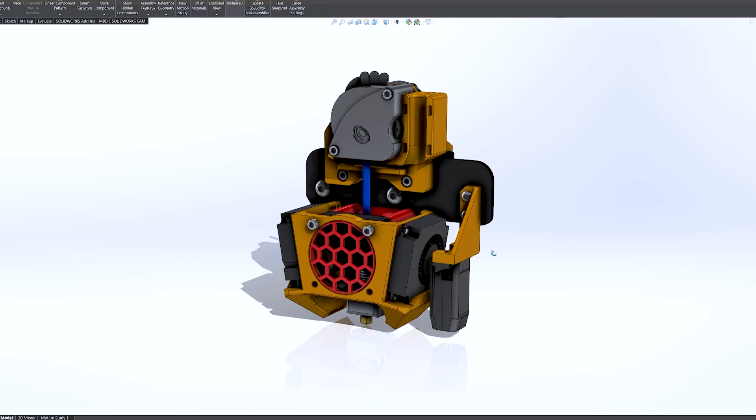And the rest of the video, I'm gonna be walking you guys through how to do this installation. And of course, at the end, we're gonna do some test prints. So let's get started. Let's first take a look at the design and see what we're aiming for. So up at the top, you can see the Bondtech LGX Lite mounted to the Ender 3 Max X carriage bracket. And that bracket is unique to the Ender 3 Max. It's not the same as what you'll find on a regular Ender 3.

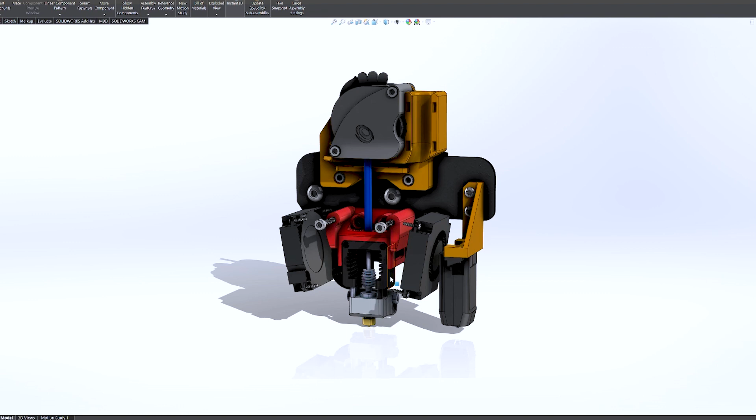On the sides, you'll see that I've reused the dual 4010 part cooling fans, and in behind the fan shroud and axial fan, you'll see the Slice Engineering Mosquito Magnum with its mounting bracket. And if you guys plan on using a CR Touch or BL Touch like I do in this video, I've created a bracket for that so that you will have the correct probe offset and you won't have to change it in the firmware.

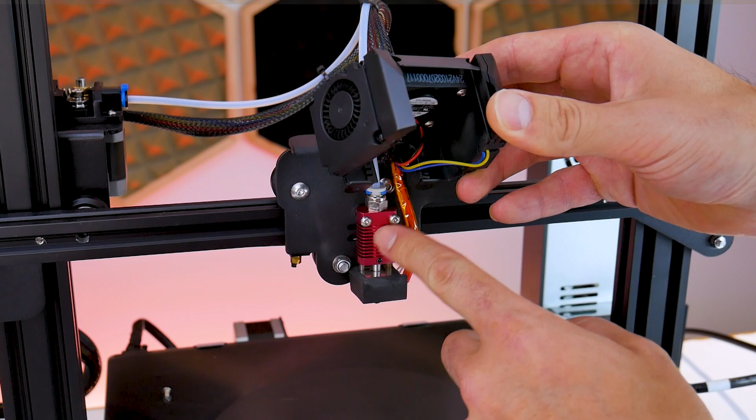Now we can start the disassembly on our machine, and the first thing we need to do is remove the fan shroud. So there are two M3 button head cap screws up at the top of the fan shroud. You're going to remove those and the entire shroud will come off. Beneath that, you'll find two more M3 button head cap screws holding the extruder heatsink to the X carriage bracket, and those you will remove as well. We are going to be reusing all of the fans in this assembly, but we do need to remove them from the original fan shroud.

And to do that, the two part cooling fans on the side are attached with four M2 socket head cap screws. So remove those and the fans will come off. And you'll notice that there are two part cooling nozzles, one for each of the part cooling fans. Those we will not be reusing, so you can just discard those. During this disassembly process, just be careful with the wires on these fans. The wires themselves are quite small and their connections are sometimes a little bit delicate. You do not want to damage them.

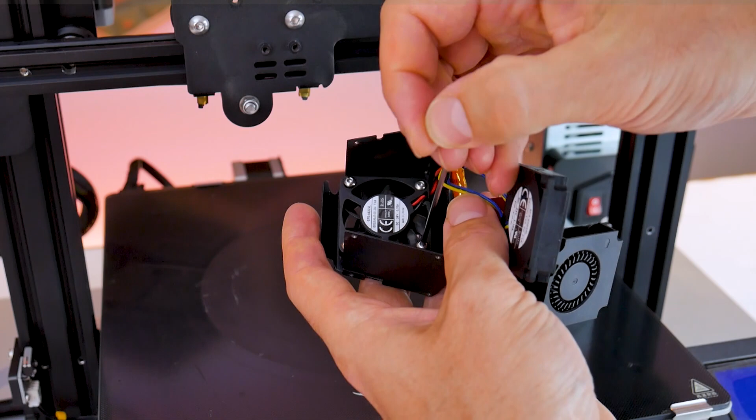You're going to repeat this process for the other part cooling fan, and then in behind the heatsink for the extruder, you'll find the extruder fan, which is just an axial fan held in there with four more button head cap screws. Go ahead and remove those, and then everything should be free from the fan shroud, and you can just get rid of that fan shroud because we won't be needing it anymore.

Now you can use your side cutters to cut away any zip ties holding the wiring harness and the Bowden tube together. Then you can remove the Bowden tube from the extruder assembly on the X gantry, and then you're ready to remove the heater cartridge and the thermistor from the hot end. To do that, you're going to need a hex key and loosen off the grub screw on the bottom of the heater block.

And then you're going to need a Phillips head screwdriver and remove the retaining screw that retains the thermistor in the heater block, and both of those things should pull right out.

Then take your old hot end and throw it in a box, telling yourself that you might need it one day, let it sit there for 5 years, and then after 5 years throw it in the garbage, and then find out the very next day that you do in fact need it.

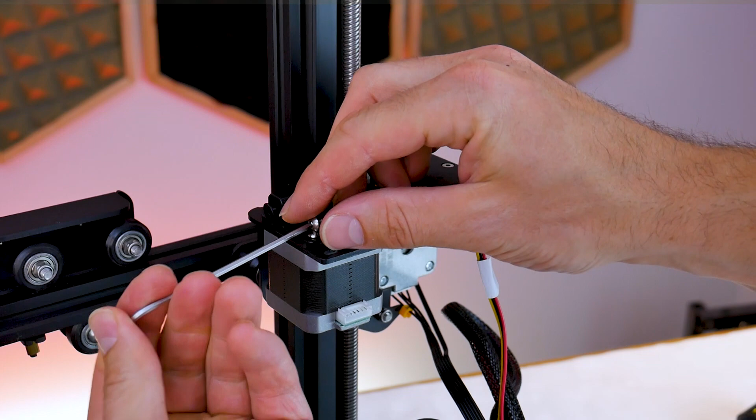Now we can start to strip down some of the parts off of the original Bowden tube extruder setup, and you can start by disconnecting the stepper motor on the extruder, and then you can start loosening off the tensioning screw from the tensioning arm. At the back of the tensioning arm, there should be an M3 socket head cap screw that is the pivot point for this arm. Completely remove this screw, and then the tensioning arm should be able to be removed from

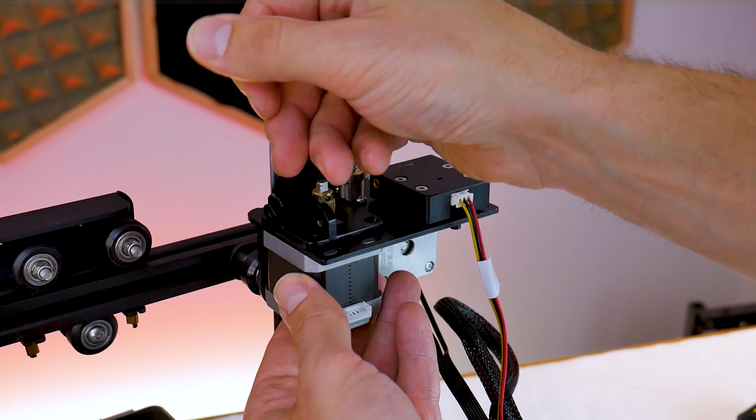this entire extruder assembly. There are three more M3 screws holding the stepper motor to this bracket, and you're going to want to keep your hand underneath the stepper motor while you remove these screws, because there is this mysterious thing called gravity that will cause the stepper motor to fall and smash your glass build plate if you don't catch it once the last screw is removed.

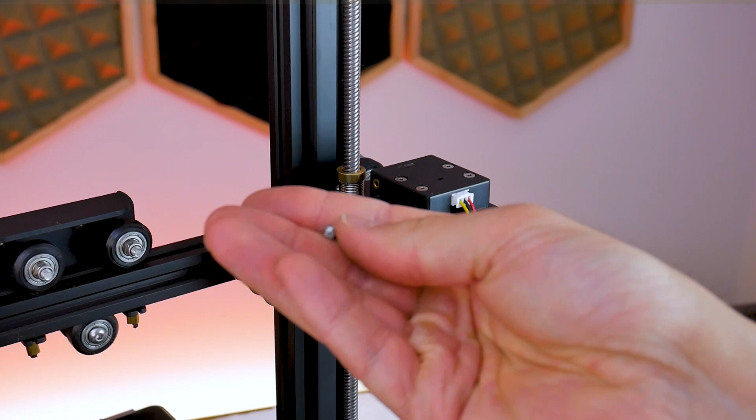Then you can reinstall the original filament guide plate, and those three screws will be reused, but you will need three M3 nylon locking nuts to attach this plate since you're not reusing the motor.

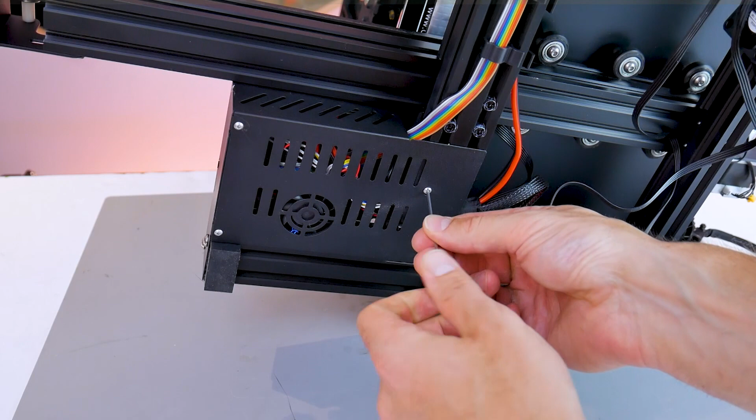Then we're going to need to gain access to the main board in order to unplug the original thermistor and hot end, and to do that, we go to the top of the enclosure of the main board and remove this single M3 screw. There are 3 more button head cap screws on the bottom cover, and to gain access to those, you will have to carefully tip your machine onto its side, remove these 3 screws, and the cover should come off. Do not violently pull the cover off, as the main board cooling fan is still attached to this cover by its wires.

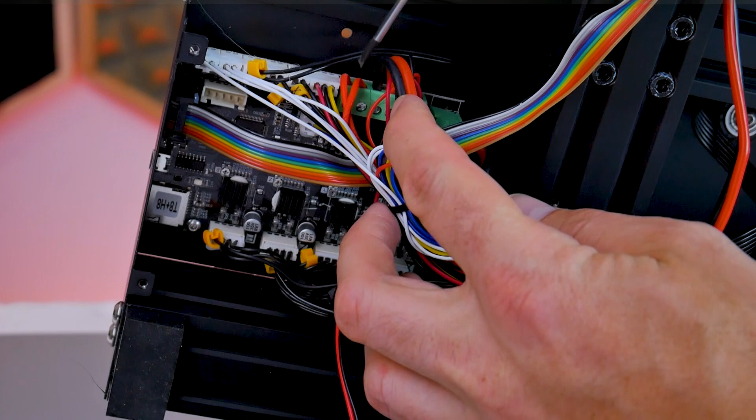Up at the top of the main board, you'll see some screw terminals, and the ones on the left hand side with 2 red wires leading into them are for the heater cartridge. Loosen off these screw terminals and the ends of the wires should easily pop out. And then on the left hand side of the board, you'll find a connector, and there might be some hot glue holding it in place. You're going to have to carefully remove some of that hot glue, and the connector for the thermistor should just pull right out pretty easily.

I'm going to be fishing these wires out of the wiring harness because we are going to be replacing them. And so I'm going to carefully cut away some of the zip ties and then remove some of this wiring harness tape so that I can get those wires to pull out of the wire sheathing. Personally, what I find works best for me is depinning the connector on the thermistor, and then you pretty much just have 2 bare wires, and you can pull the wires right out of the wiring harness out the direction of the hot end.

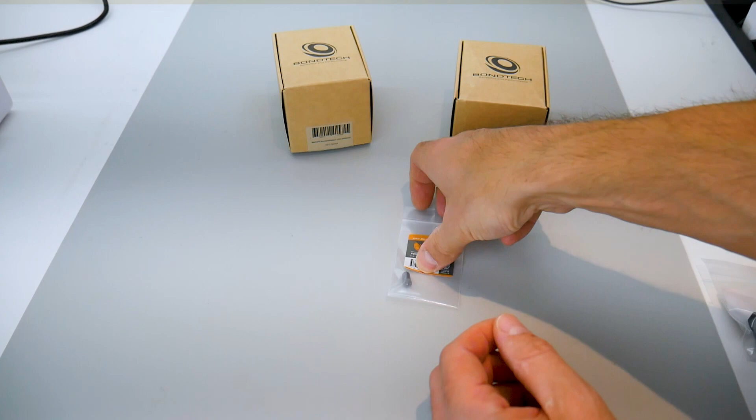They also sent me the silicone boot for the Mosquito Magnum hot end, as well as a 0.6mm vanadium nozzle, and these are my favorite. I've pumped tons of carbon fiber PETG through these on an Ender 7 build, and I've never had one wear out. In the first box from Bondtech, we'll find the LGX Lite extruder, and you'll notice that there is no motor attached to this one. And these extruders take the pancake style motors, and that's what we're going to find in the second box. So this is an LDO motor in the second box compatible with the LGX Lite.

They include the datasheet for the motor, which will come in handy later if we have to swap any of the pins on the connector to get the extruder to turn the right way with the Creality wiring. Now to address the thermistor, what I have here is a cartridge style thermistor. So we have to switch from the Creality bead style to this cartridge style, and that's going to fit inside of the Mosquito Magnum hot end.

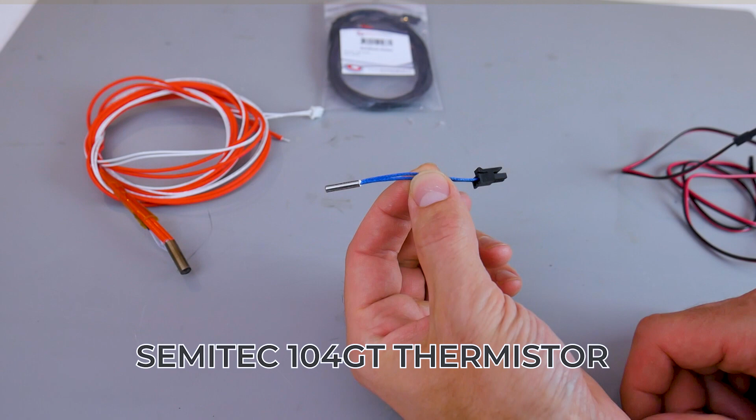And to make our lives as easy as possible so we do not have to do a custom firmware build with a new thermistor table, what I have here is the Semitec 104 GT thermistor. From my research, its temperature table is very close to the standard Creality bead style thermistor, and therefore in the temperature range of PLA, ABS, PETG, and other common materials, we may only be a degree or 2 off in the true temperature, which is pretty easy to live with.

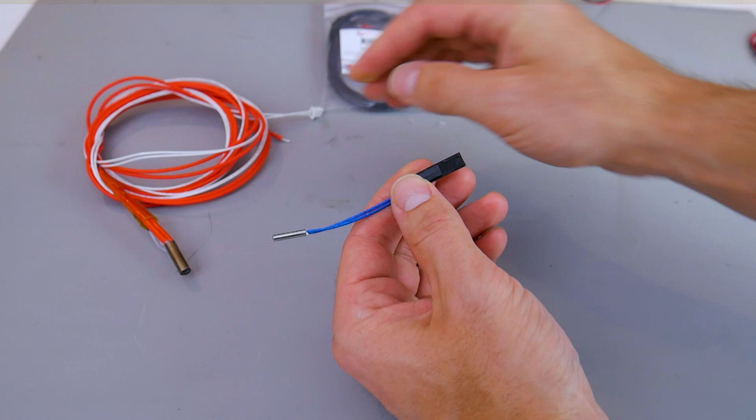The one that I have here has a Molex Microfit 3.0 connector on the end. Unfortunately, the wires on the other end were too short for the Ender 3 Max, and so what I'm going to do here is I'm going to reuse the wiring from the original thermistor. I'm basically just going to cut those wires and crimp on new terminals for the mating connector for the other end of this Molex 3.0 Microfit connector.

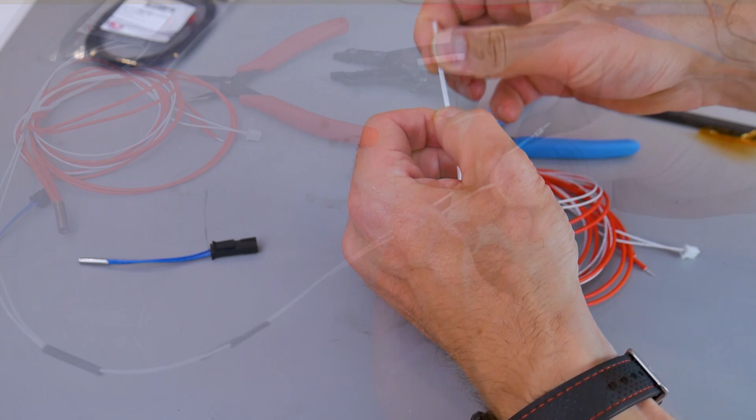I'll put a link in the top right hand corner of the screen to a previous video that I've made about crimping JST style terminals with a pretty generic crimping tool like this one. And the same concept and tool can be applied to these Molex style terminals. So go check out that video if you want to learn how to do that, but the end result is having these 2 terminals on the end of the original thermistor wires that will just clip into place inside of the new Molex connector. Now we can plug it into the thermistor, and the other end still has the JST connector on it, which will mate with the main board.

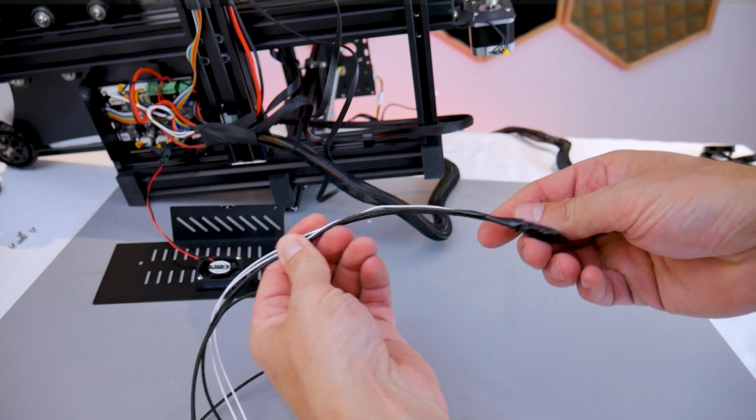Now I'm going to push the thermistor and heater cartridge wires through the wire sheathing, and we're going to go from the hot end side back to the main board. And you'll see that I've wrapped the connector ends in some electrical tape, and that's in hopes of preventing those connectors from getting snagged on that wire sheathing. Once the wires exit out the other end, then you can take the electrical tape off and we can remake our connections onto the main board.

Both of these components are basically just resistive elements and therefore have no polarity. Therefore, it won't matter which way you've repinned your thermistor connector, and the 2 free ferrules that go back into the screw terminals for your heater cartridge. You can put them back in any order. If you have a hot glue gun, you can also apply some hot glue to the thermistor connector to ensure that it never pulls back out.

While we're dealing with the wiring, this is also a good time to install the CR Touch or BL Touch wiring harness. In this build, I'm going with Creality's CR Touch, and so I'm going to take the CR Touch wiring harness, and I'm going to take the smaller connector, which is the connector that plugs into the CR Touch module, and I'm going to have to fish that through the wire sheathing for the printhead.

The larger connector will plug directly into the main board, and you can see the receptacle right underneath of the thermistor connector that we just dealt with, and these connectors are keyed, so don't worry, you can't plug it in backwards. Then you can tidy up your wiring down here a little bit, but do not put the cover back on just yet because we're not done with the main board. We'll come back to this later.

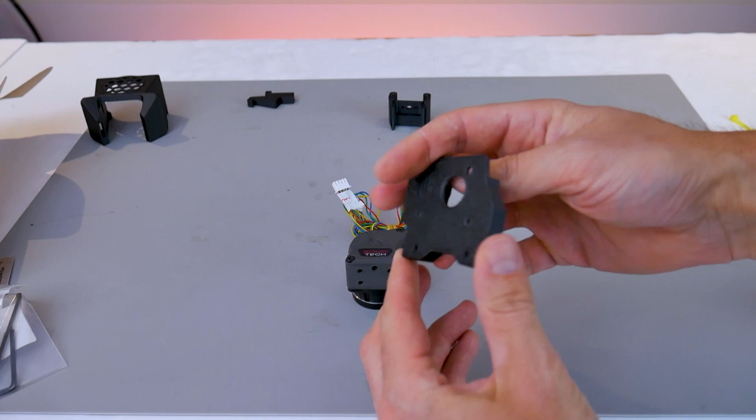Now we can start some of the assembly work on the hot end and extruder, and in this video we're also going to be installing a CR Touch module from Creality. The CR Touch and the BL Touch are interchangeable, so it doesn't really matter which one you decide to go with. And to begin our assembly, we're going to take our Bondtech LGX Lite, and I'm showing it here in its assembled form. You can order it as an assembled kit, or as I showed you guys earlier in the video, it might come in 2 separate boxes if you order the extruder and the stepper motor separate from one another.

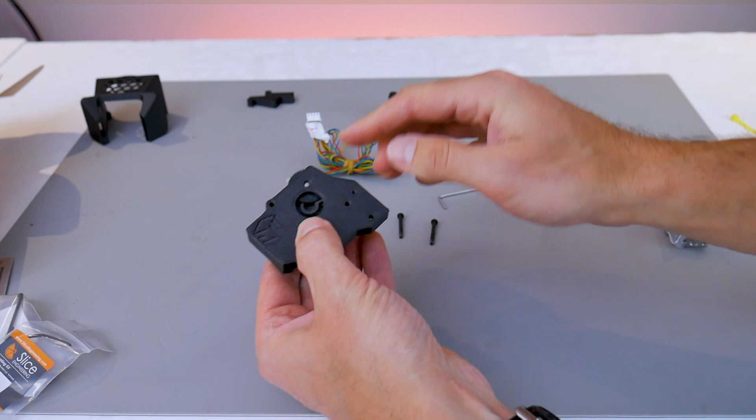The entire LGX Lite assembly is held together with these 2 long M3 socket head cap screws, and after you undo those, the motor can be removed from the back, and there's a small plate that can be removed from the middle of the assembly, and my 3D printed adapter will replace that plate.

Then you can take your motor and put it back on top of the new plate, take your extruder, put it on the front of the plate, and reinstall the 2 long M3 socket head cap screws. And when you're done, it should look something like this.

Now we can also start assembling the hot end and the hot end mount. So we're going to grab our Mosquito Magnum hot end and the hardware kit. In that hardware kit, you'll find a bunch of M2.5 screws. You'll also find some small washers for these small screws.

We're going to be putting those washers on top of the M2.5 by 10 millimeter long socket head cap screws, and we're going to be inserting those into the 2 outer holes in the top of my Mosquito Magnum mounting bracket. I like to add a little bit of thread locker onto these screws because over time they can loosen and you don't want your hot end flopping around.

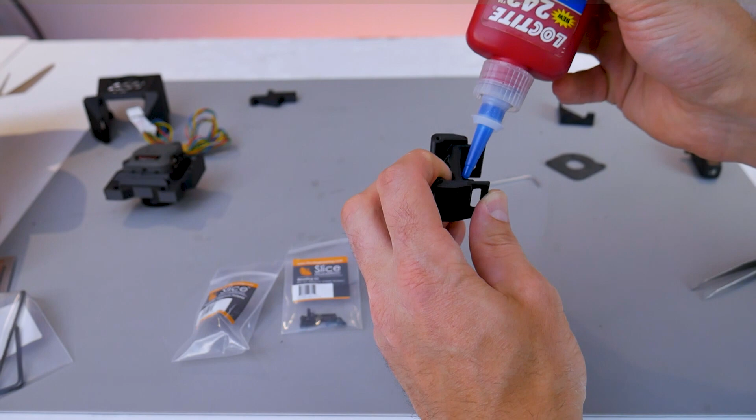The hot end should be a nice snug fit into the bottom of this bracket, and those 2 screws will draw it in and securely fasten it down. Now you don't have to go crazy here with the torque. You got to remember that these are small screws and this is a plastic mount that you're using. And plastic generally exhibits a pretty significant amount of creep over time.

And mechanical creep is basically a time-dependent component of plastic deformation while that plastic is under load. And so one thing you have to watch out for is that over time, the plastic under the heads of the screws will deform and the screws will lose tension. Therefore, initially over-tightening these screws is not going to compensate for this inherent mechanical property of plastic. Rather, what I would recommend is going back and retightening these screws periodically until that plastic fully settles.

Now we can prepare the CR Touch and its mounting bracket. The CR Touch comes with a few different types of hardware. We're going to be using these M3 by 6 button head cap screws. And on the 3D printed mount, you'll see a little cutout for the connector, and you should line up the CR Touch such that the connector is still accessible through that cutout in the mount. The M3 button head cap screws will get inserted through the bottom of the CR Touch, and they'll thread into the 3D printed bracket. And when you're done, it should look something like this.

Now we're going to be installing the hot end subassembly that we just put together onto the X carriage bracket. And to do that, we're going to need 2 M3 by 10 socket head cap screws. Now in this video clip here, these screws that I'm showing are clearly longer than 10 millimeters, but I've since revised this part, so these screws that you would be using will be 10 millimeters long. And this hot end bracket will sit on top of the 2 standoffs on the X carriage bracket, and those 2 M3 screws will screw directly into those 2 standoffs.

Next, we're going to install the piece of PTFE tubing that's going to go between the hot end and the extruder. I would highly recommend going with Capricorn tubing if you have access to it, and this piece is 47 millimeters long.

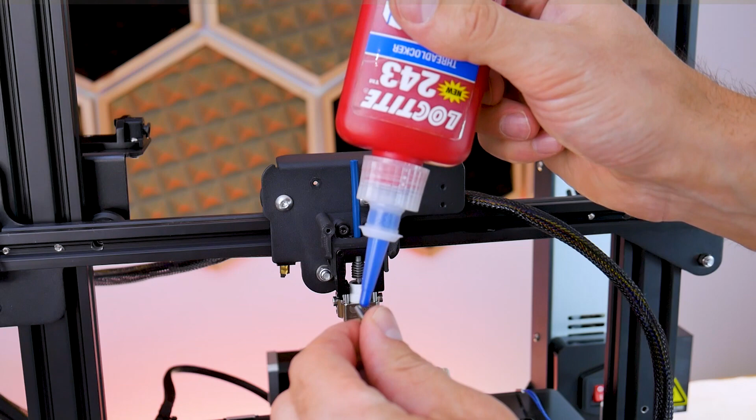Then we're going to grab 2 more M3x10 socket head cap screws and apply a little bit of Loctite. And these 2 here are going to fasten the extruder bracket to the X carriage bracket. The 2 M3 screws sit inside of the counterbored holes in the extruder bracket. And when you are installing this onto your X carriage bracket, you're first going to start by inserting the PTFE tube into the bottom of the Bondtech LGX Lite, and then those M3 screws should line up with the 2 holes on the X carriage bracket, and you can tighten those screws down.

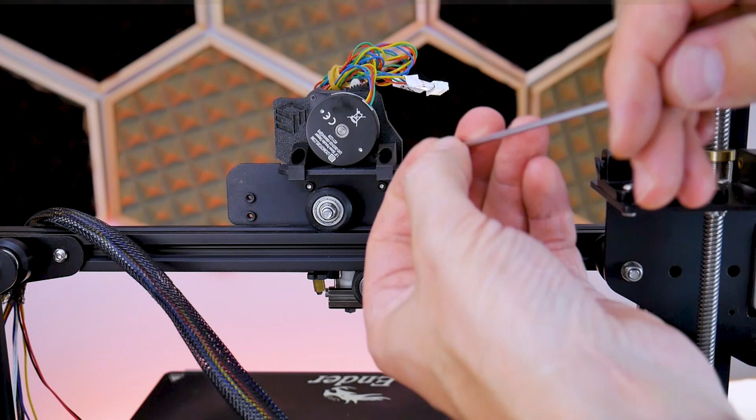Looking at the back of the X carriage bracket, we're now going to install 2 3D printed reinforcement brackets. These 2 reinforcement pieces will hook over top of the back of the X carriage bracket, and then we're going to take 2 more M3x10 socket head cap screws, and those will get inserted into the counterbored holes inside of these 3D printed parts, and those screws will thread directly into the extruder mount.

Back at the hot end, we're now going to remove the retaining screw from the right hand side of the heater block, and then insert our heater cartridge and thermistor. I've applied some of Slice Engineering's boron nitride thermal paste, which gives us the best thermal conductivity between these components. Once these parts are inside the heater block, you can replace the retaining screw to prevent them from coming back out.

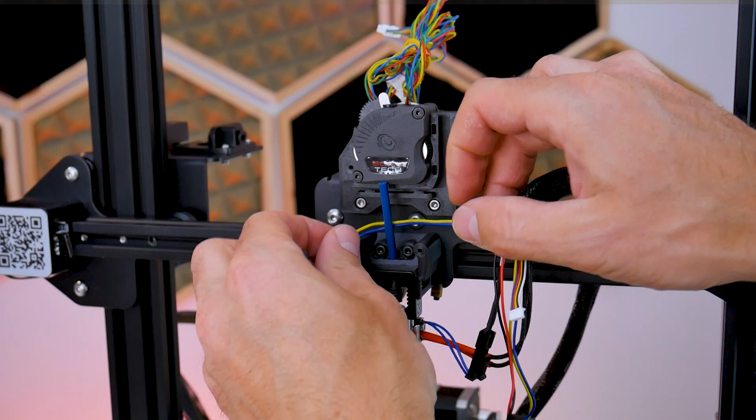Now we can start to position and route some of our wiring around the print head. On the top right hand side of the extruder bracket, you'll find a strain relief. On the left hand side of the print head is where the left hand side part cooling fan will go. You can see I've pulled away the PTFE tube, which is flexible enough to pull out of the extruder, and I've routed the left hand side part cooling fan wiring into a small wiring channel I designed into the extruder bracket. The part cooling fan will sit on the left hand side.

Any excess wiring I push back up into the wire sheathing so I can get the right amount of slack, so when components sit in their final position, the wiring looks neat and tidy. Once I'm happy with the approximate amount of wiring needed, I take zip ties and insert them through the strain relief. Just push them through one side and they'll come out the other side. At this point, don't fully tighten the zip ties, because once the fan shroud goes on, we're likely going to have to push and pull on those wires a bit more.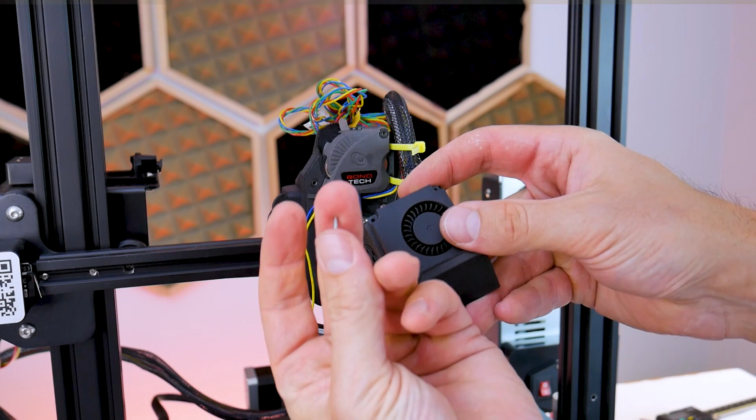The fan shroud is next, and we're going to take the right hand side part cooling fan and remove the wires from the strain relief that's part of the fan body. You can see me pulling the wires out here, because we need to bend them back a little so they fit within the slot of the fan shroud. The radial part cooling fan will sit up against the side of the fan shroud, and there's a small raised lip it will sit inside of that holds it in place while you screw down the fan. Each part cooling fan gets fixed in place with M2x8 thread forming screws, 4 of them per fan.

Then we do more or less the same thing on the left hand side with the left hand part cooling fan, although we will not have to remove the wires from the fan's own strain relief. They'll just bend back nicely, and you'll see I took the wires and slipped them through the cutout in the fan shroud, allowing them to bend as you see and sit on the inside of the part cooling fan shroud. 4 more M2x8 thread forming screws fix the left hand side part cooling fan in place.

Next, we're going to mount the extruder fan inside the fan shroud, making sure it's pointing in the correct direction so the airflow flows towards the extruder heatsink. There will be 2 M3x22mm long socket head cap screws that fix the whole thing into place.

You will have to move some wires around and bundle other wires together. I'd suggest trying not to push and pull too much on the more delicate thermistor wires, and any excess wiring you can push back up into the wiring harness. Once everything is in place, those 2 M3x22mm socket head cap screws thread into the standoffs of the hot end mount.

Then we continue to clean up the wiring, making sure the braided wire loom sits inside the strain relief. You want to take those zip ties and start to snug them down a little bit to clamp down on the wire loom and not on the bare wires themselves.

Then we can mount the CR Touch assembly, and I'm going to take the connector and plug it directly into the probe. From the CR Touch kit, there are two M3x8 button head cap screws that will fix this assembly to the X carriage bracket. The Creality X carriage bracket already comes with two holes on the right hand side where these screws will thread into.

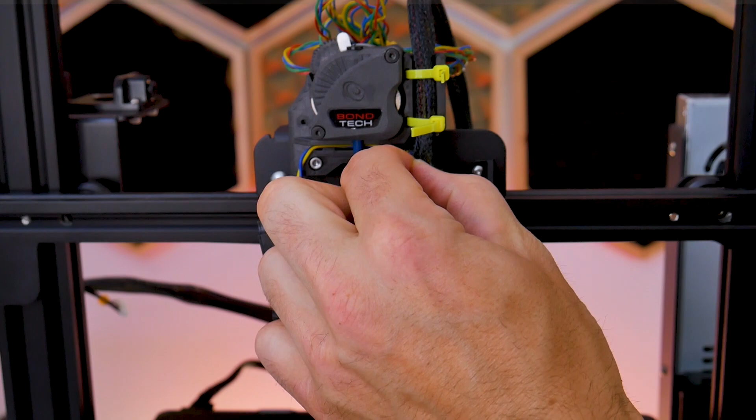With all of the print head components in place, we now know that we have enough wire to reach all of these components. So what I like to do here is just pull down that braided wire loom a bit more and place one more zip tie below the strain relief on the extruder bracket. This is really going to ensure that the connectors of the wires are never pulled on and nothing ever comes loose. When you're done, everything should look like this.

Now we need to address the extruder motor wiring. The LGX Lite comes with this 4-pin connector, and the original Creality harness has a 4-pin connector, and unfortunately both of them are female connectors. So what we need to do here is either splice them together directly, or in my case I decided to go with a wiring harness adapter, and I put two male JST connectors on both sides.

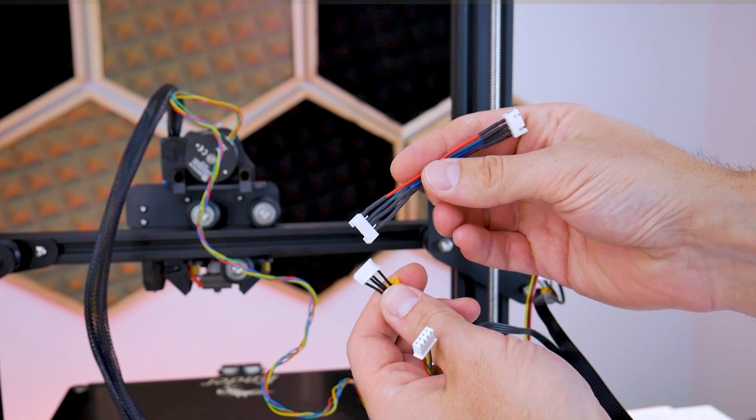Male JST connectors in the wire-to-wire variety are pretty hard to come by, so what I did here was take some board-to-wire connectors and solder my own wires onto the end of them. I really want to reiterate that you do not have to do this. You can simply splice the two harnesses together, and the reason I didn't run the LGX Lite wiring harness all the way down to the main board is that it doesn't quite reach on the Ender 3 Max. If I were you, I would just cut the two female connectors off and splice those wiring harnesses directly together. If you ever needed to replace the motor, you could just cut and resplice because there's plenty of length on the LGX Lite wiring harness.

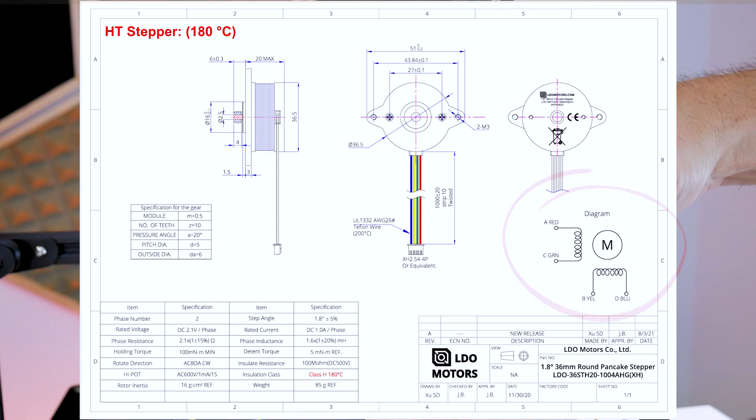Without yet having swapped any of the pins, right now pin 1 of the LGX connector is the red wire, connected to pin 1 of the Creality harness, identified with that little tag with the E on it. According to the LDO motor datasheet, red and green are part of the same coil, and yellow and blue are part of the same coil. If you line those up with the Creality harness, you'll find it goes from coil A, then B, then A negative to B negative. So we have to swap two of the pins on the LDO connector to make sure the coils match the wiring of the Creality harness.

If you've never done it, there are lots of videos on YouTube showing how to repin these JST connectors. You can see here that my wire order is now red, yellow, green, blue, and the red is connected to pin 1 on the Ender 3 Max harness. Again, pin 1 on the Creality harness is identified with that little yellow tag. I hope that wasn't too confusing, but now our extruder motor will turn in the correct direction.

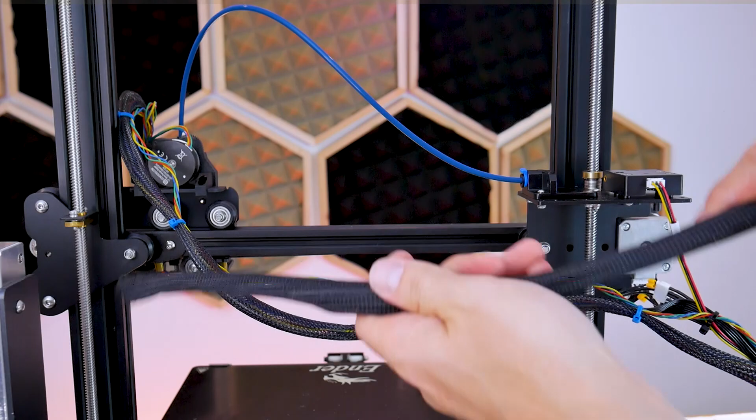Now we can tidy up some of the small remaining loose ends, including the PTFE tube from the X gantry all the way to the LGX Lite, and I'm going with the Capricorn tube here. Then we can tidy up the wiring, attaching the wiring of the LGX Lite to the main wiring harness, and I'm going to use some split loom to further support the wiring harness from the printhead all the way to the X gantry.

The braided split loom is really great stuff because you don't have to fish wires through it. You can just wrap it around existing wiring harnesses. You can see that I've cut the original zip ties on the strain relief on the printhead, and I've replaced them and brought that split loom down into the strain relief to provide even more support to the wiring harness.

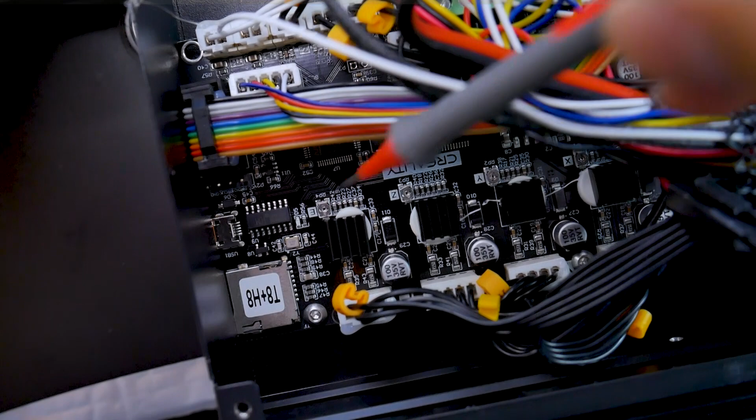If you recall from earlier in the video, we did not put the cover back on the main board because we now need to access this trim pot for the extruder stepper motor driver. You can see that I have my probe from my multimeter, and we're going to be probing the center of this trim pot. But first I'm going to turn it slightly counterclockwise to bring the reference voltage down.

And what we're shooting for here is about 0.9 volts. If you've never done this before, I'm using the black ground probe, touching any ground point on the board. In this case, I'm using the negative screw terminal from the input power coming into the board from the power supply. Do not turn the trim pot screw too much.

Small adjustments will result in pretty big changes in the reference voltage. And by adjusting that reference voltage, what you have just done is limited the amount of current being delivered to that smaller pancake motor on the new LGX extruder. Finally, we're ready to tuck our wires back in and reinstall the main board cover.

If you've installed an auto bed leveling probe, we now need to do a firmware update, and the firmware needs to match the version of the main board that we have. In my case, I have the older 4.2.2 main board, and I've found a version of the firmware on Creality3dofficial.com. This is a distributor of Creality products, not the actual official Creality website.

That's because, as you see here, on the official Creality website, you'll only find the auto bed leveling version of the firmware for the newer 4.2.7 version of the main board for the Ender 3 Max. Now, if you're asking why you can't find the auto bed leveling version of the firmware for the 4.2.2 version of the main board for the Ender 3 Max on the actual Creality website, that's when you're just gonna have to stop asking questions, because this is pretty much how Creality operates. If you're not already familiar with their antics, well, here's your first foray into some of the weird things that they do. But as you can see, at least they have the 4.2.7 version of the firmware available, so you can get that from them.

Then you need a clean formatted 8GB micro SD card, and you're gonna take the firmware file that you downloaded, which should be a .bin file, and copy it onto the SD card. Now you can pop the SD card into the printer, and you're going to power it back on.

In a few moments, you should see the Ender screen flash back up, and the firmware should have been updated. You can power cycle the printer again, and up until this point, if you've done everything correctly, you should see a purple looking light on your CR Touch module. Red lights are bad, purple is good. And if you really want to make sure the firmware was updated, you can go down into the About Printer, and you can see the firmware version.

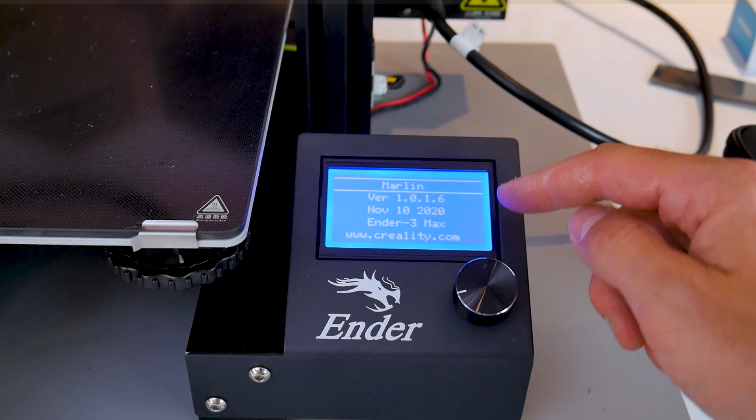Before we can start printing, we need to take care of a few more things, and I've connected the printer to a print host, in this case Repetier host, and you can see that the printer has successfully connected. Then I'm going to go up to the G-code terminal and type in M503, and this is going to bring up all of the printer settings. I'm going to be looking for an M92 line, and you can see here it says E93, and that means I have 93 steps per millimeter right now for the extruder.

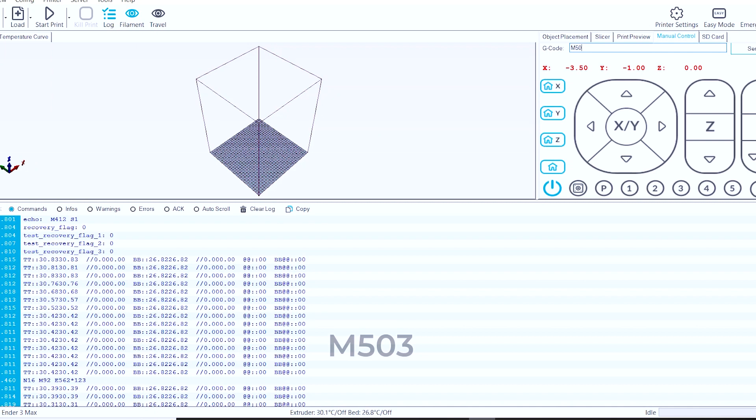We need to change that, so we're going to go M92 E562. To see if the printer successfully changed the E steps to 562, I'm going to type back in M503. I'm going to look for the new M92 line, and yes, it says E562. So we're going to save that by typing in M500. And if you're finding that it's not saving these commands, you might have to check to see if you left the SD card in the machine, because without the SD card, it won't save it.

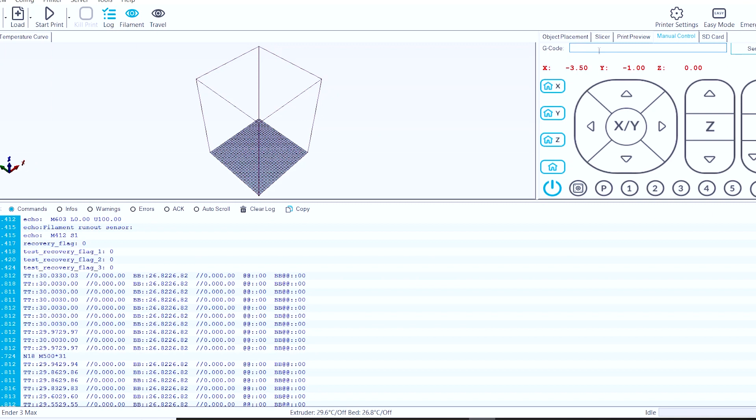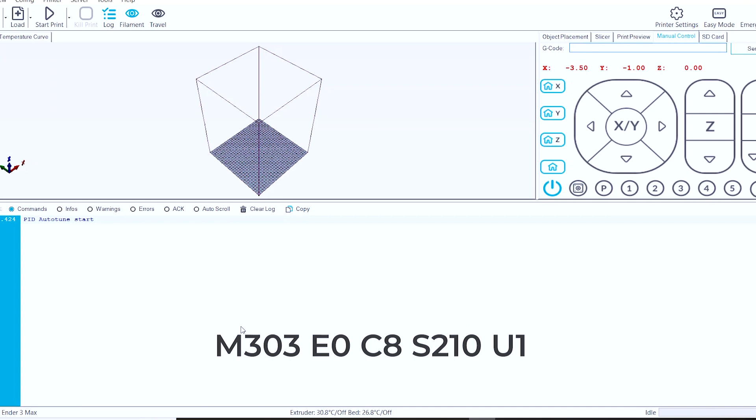After that, we have to run a PID Autotune for the new hot end. So M303 initiates a PID Autotune. C8 just means that we're going to run through 8 cycles of testing. S210 means we're going to center the temperature around 210 degrees Celsius. And U1 indicates to the printer that you're going to write those new values to memory once the testing is complete. If you plan on running higher temperature materials, consider centering your PID Autotune around the print temperature of the material that you wish to run.

The process should take a few minutes, and then you should be able to find a message that says PID Autotune finished, and you'll see the new values. And although we told the printer to use the new values immediately after finishing the PID Autotune, it's still not a bad idea to just make sure those values are saved in memory by typing in M500 one more time.

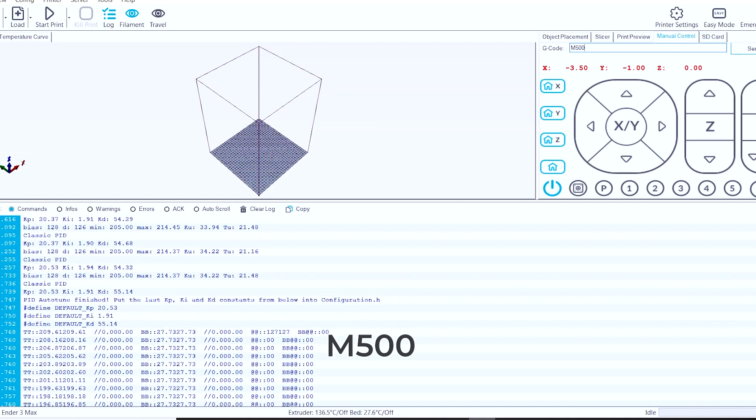And then immediately after that, you can type back in M503 to make sure the printer spits back the new values. So go ahead and look through all of that newly printed information, and on the line that says M301, you should see the new PID values that match the ones that you saw when the Autotune finished.

Now that we have the proper PID settings for the hot end, I'm going to turn the nozzle temperature up to about 230 or 240 degrees and double check the tightness of the nozzle. If you guys are doing this, don't go too crazy. It's just a very small nozzle. It only needs to be lightly torqued.

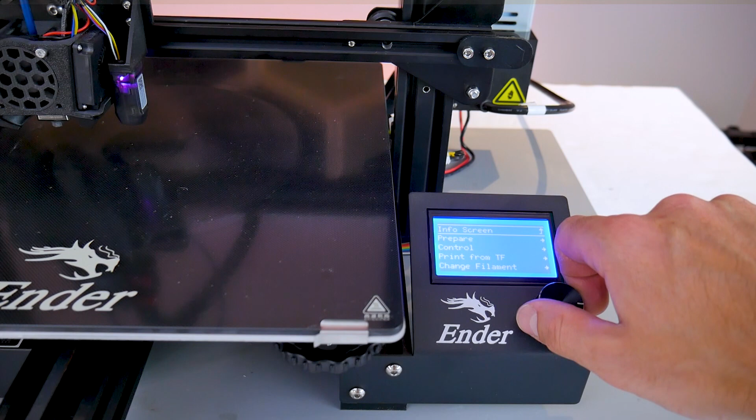After that, I'm simply going to home the printer, because the next thing we're going to do is set the Z offset and level the print bed. But before we do that, I like to let the print bed heat soak. So I'm going to set the print bed temperature to 60 degrees Celsius, which is typically what I run for PLA, and I'm going to let the print bed sit for about 5 minutes at 60 degrees.

In order to get the proper Z offset for the new auto bed leveling probe, I'm going to have to move the Z axis into the Z equals 0 position. You'll also see me temporarily disable the stepper motors here just because it's easier to move the print head around by hand. And I'm going to move that nozzle approximately to the middle of the print bed. And again, with the paper, you can see there's too much room between the nozzle and the print bed when the nozzle should be at Z equals 0.

And now with the new firmware, you can see in the bed leveling area, there is a Z offset section. So when you head into that, you can adjust the Z offset into the more negative space, and that's going to bring the nozzle closer to the print bed. And using a piece of paper, you should feel a light drag between the nozzle and the print bed with the piece of paper in between.

With the new probe offset established, I'm going to auto home the printer again and then tell it to go back to Z equals 0 so I can double check the position of the nozzle with respect to the print bed using the piece of paper method. What you might find is that you'll have to make some further adjustments to the Z probe offset, and this is what I had to do. I had a little too much space, but unfortunately with the Ender 3 Max firmware, you can only make adjustments in increments of 0.1 millimeters, which doesn't give you very fine resolution for the Z probe offset.

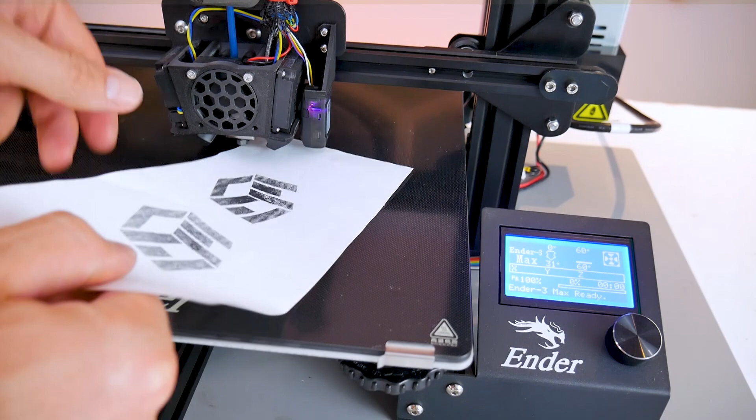However, what I found on other Creality machines, which I think is really odd, is that if you're making live adjustments, so while a print is actually going on, you can change things like the Z offset. And that is essentially the Z probe offset. And while you're doing it live, some Creality firmwares allow you to have a finer resolution while making live adjustments than while making adjustments like this, not during a print.

And so once I'm happy with the offset, at least for now, I'm going to disable the stepper motors again because I'm going to manually move the print head around while I do the bed leveling with the bed leveling knobs. And I see this question come up all the time online. If I have an auto bed leveling sensor, why do I still need to level the bed using the bed leveling knobs? And the answer to that is that you want the printer to have to compensate as little as possible using the auto bed leveling system. Having your printer properly trammed right from the start will always yield better results than having the Z axis constantly move around to compensate for a poorly trammed printer.

And finally, we're now ready to run the auto bed leveling. So in the bed leveling section, you can just hit level bed and the printer will go ahead and initiate the auto bed leveling process, whereby it should measure about 16 points across the print bed and save them into the printer's memory.

Loading filament into your new extruder and hot end is extremely easy, and with the LGX Lite, what I like to do is remove the PTFE tube from the top of the extruder. Make sure that your hot end has been preheated to the proper temperature, and then what I like to do is push the filament in through the filament runout detection sensor through the PTFE tube, and then you can grab it by your hand and force it down through the hot end until you see it come out of the nozzle. Once you see filament coming out of the nozzle, you can push the tensioning lever over into the first position, and that's more than enough tension for PLA.

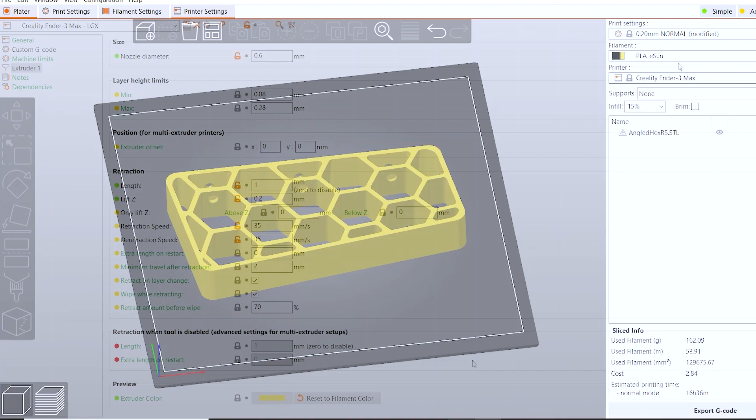And for me on this machine, I'm going to be running a 0.6 millimeter nozzle. So I'm going to change the nozzle diameter up at the top to 0.6 millimeters. And then one thing I forgot to show in this video clip here is that I should also change the layer height limits because I'm using a larger nozzle diameter. So under the layer height limits, there's a maximum layer height setting, and I should change that to about 0.4 millimeters in my case.

Now, if you've been 3D printing for a while, you've likely seen other videos outlining the advantages of running a larger nozzle. And so what I'm going to do here is go through that, but then also show the advantage of having a better hot end with a larger volumetric flow rate capability. So right now I'm setting up my slicer with this part to have pretty much the default settings for the Ender 3 Max. I'm going to be running a 0.2 millimeter layer height and using all of the other default settings for PLA and the printer. And the only thing I've changed in the print settings was just to make sure that I had 3 perimeters and 3 layers on the top and bottom of the part.

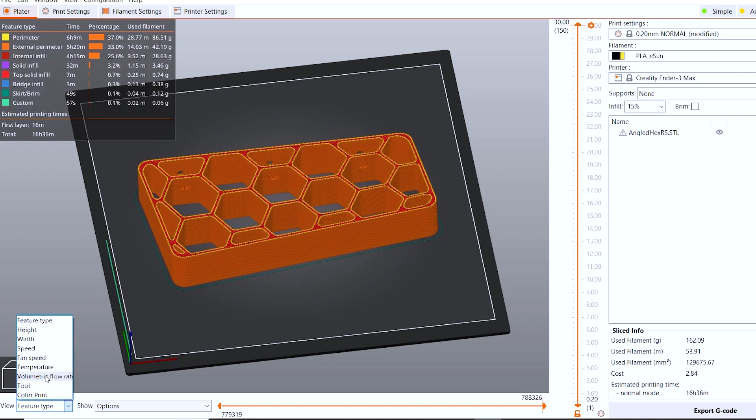The infill setting I'm going to run at 15%, and when I go to slice this file, you'll see here that with the default settings, this very large part comes out to about 16.5 hours. In this case, most of that time is spent on the infill and perimeters and external perimeters, and that's because there's a lot of empty space in this hex pattern part. In terms of the volumetric flow rate, you can see here that I'm not reaching anything over about 5 cubic millimeters per second, and although the stock hot end is capable of doing more than that, I just want to show you with the default settings what kind of print times you would get.

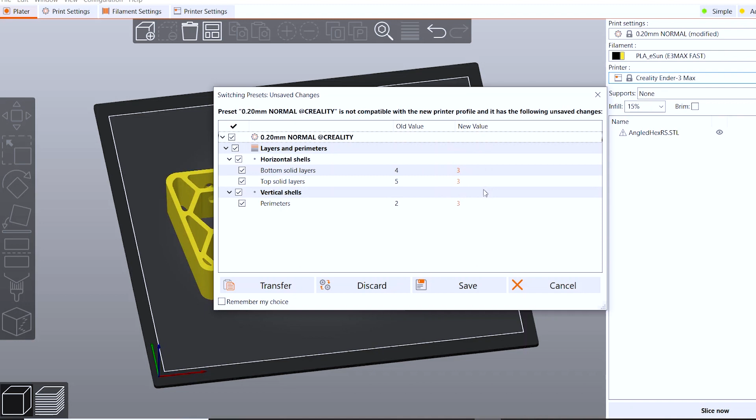Now I'm going to swap some parameters over to settings that better suit the Ender 3 Max with the upgrades that we just performed. And so in the filament settings, I've changed the maximum volumetric flow rate to 20 cubic millimeters per second. And the Mosquito Magnum hot end should be able to do that with ease. When I performed this exact upgrade on my Ender 7 using the LGX Lite extruder combined with the Mosquito Magnum hot end, I ran some benchmark flow tests and I could easily hit 30 cubic millimeters per second.

So this is pretty conservative. Now in the print settings, I'm going to change the layer height to 0.4 millimeters, and in the vertical shells, I can leave it at 2 instead of 3, and that's going to give me the same vertical shell thickness, because when we had a 0.4 millimeter nozzle, if I had 3 walls at 0.4 millimeters, that's a 1.2 millimeter wall thickness, and now I have 0.6 millimeter walls times 2. So I still am achieving a 1.2 millimeter wall thickness.

And in this profile, I actually just slowed down my linear speeds to better match the default Creality profile that I just originally sliced with, just to show you guys that by simply changing the layer heights and not much else, we can reduce the print time from 16.5 hours all the way down to close to 7 hours. So 6 hours and about 45 minutes, and that's incredible.

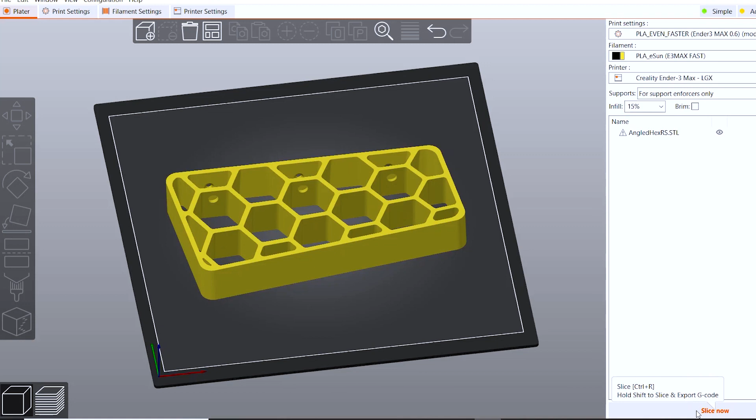And so I switched print profiles yet again, and in this case, the perimeters are going to be set to 75 millimeters per second, the infill speed to 65. Pretty much all of the other parameters are the same. Infill density, I'll make sure is at 15%. And just to show you guys I'm not messing around with anything here, the layers are still 0.4, perimeters 2, and the horizontal shells at 3 at both top and bottom. So we'll slice again, and we'll find out if we've saved any more time.

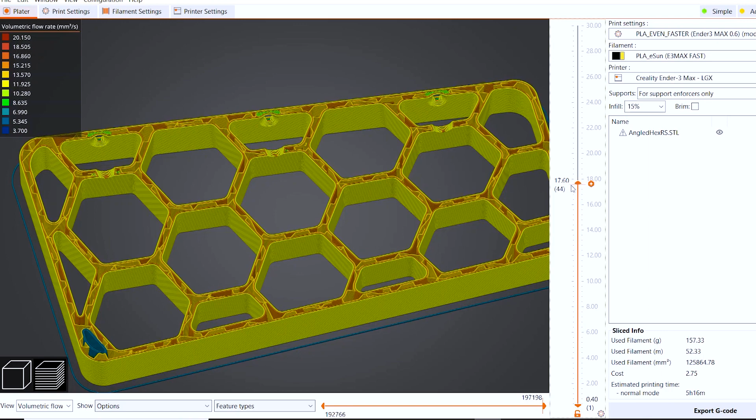And in fact we have, so we've gone down now to about 5 hours and 15 minutes. Knocking another hour and a half off of this print from about 6 hours and 45 minutes is roughly about a 20% savings in time just by changing the linear speeds. And now I'm only up to a volumetric flow rate maximum of about 20 cubic millimeters per second.

And the hot end definitely has more, but to be honest, at this time I have not spent enough time with the Ender 3 Max dialing in all of those little settings to optimize print quality along with speed. So for now, I'm just going to stop there so that we can get started printing, and the print quality should still be very acceptable.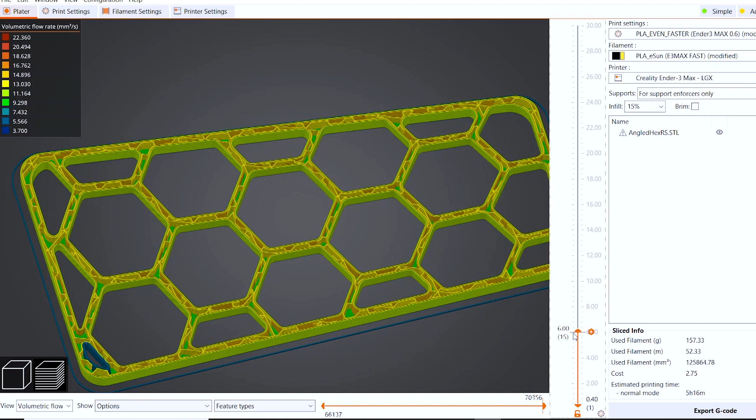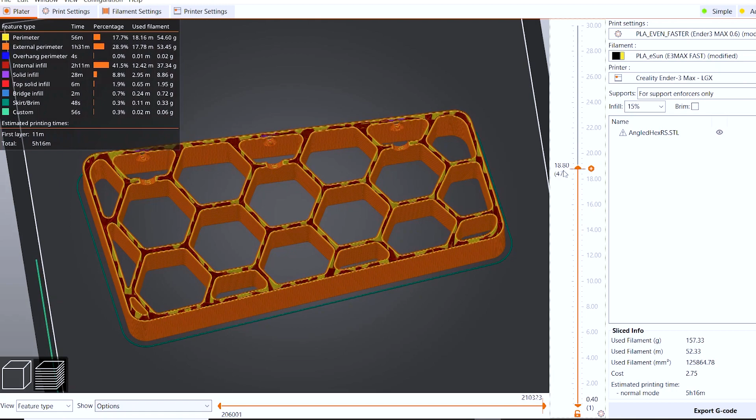And so what I think you should take away from this very simple example is how effective the larger nozzle is, and then how much further you can push that larger nozzle with a much more capable hot end. With the regular Ender 3 Max hot end, you might be capped at, let's say, 10 or 12 cubic millimeters per second flow rate, and that's going to limit how fast you can print and how efficiently you can use the larger build volume of the Ender 3 Max.

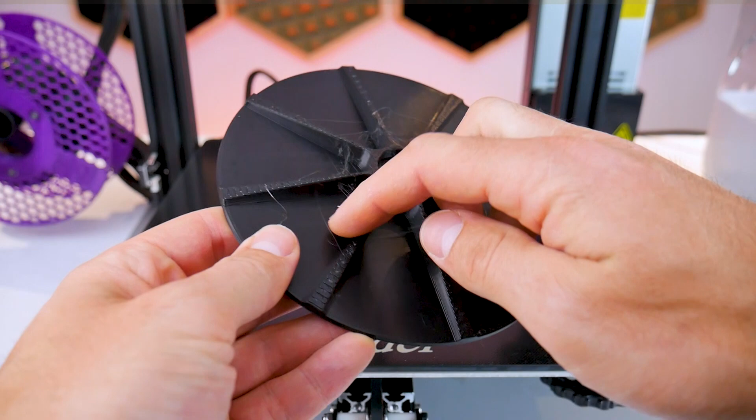Finally, the moment we've all been waiting for, and this is the very first print with the new upgrades. And so I have not sped up or slowed down this video clip, and you can see my first layer speeds are very conservative, and you can also tell this is the first print because that nozzle and heater block are still extremely clean. With the auto bed leveling sensor, I was able to print off a pretty large part, and the first layer went down super clean. The rest of the part was also very clean.

However, I do have some tuning to do to try and get rid of that stringing. Since I'm running a larger nozzle with larger layer heights and faster speeds, I did bump up the print temperature about 10 degrees on this first part, and that's probably why I'm seeing a little bit of stringing. With the higher print temperature, obviously the filament flows a little bit better, but then you also get more stringing. So I'm gonna have to try and tune that out and work on this profile a little bit, but otherwise the part looks pretty good.

Under some lighting, I can also see a little bit of pillowing on the top layers, which may also be a function of the higher print temperatures, and so I can probably rectify that with another top solid layer, or perhaps increasing the cooling a little bit on those top layers.

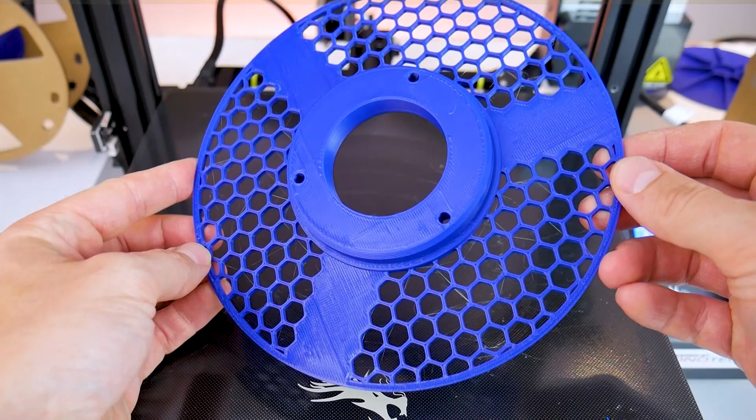Here are a few more parts that I printed in blue PLA, and it's a little easier to see the details of these prints against the black print bed. Everything turned out quite nice with these prints as well. I did drop the print temperature a little bit with these ones, so I did see less stringing.

However, one other thing that I'm starting to notice here on some of these prints is that my top layer has a little bit of over extrusion now. So in Prusa Slicer, I don't believe that you can independently adjust the flow rate of just the top layer. I think you can do that in Cura. So I'm going to have to investigate why I'm seeing over extrusion in just the top layer, but the rest of the prints turned out very nice overall.

And with those larger layer heights, I was saving a ton of time on each of these prints. Also, with the cooler print temperatures, you can see on this exact same part that I had printed previously in black, the blue part does not have that same pillowing on those top layers. So it turned out much better, and I didn't have to make any other adjustments or add any more top layers.

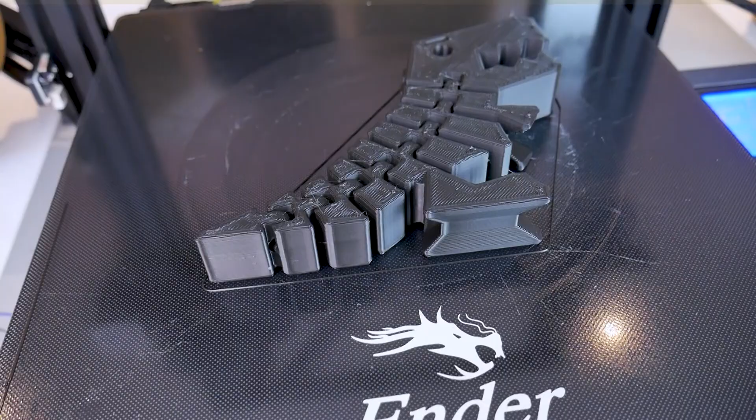Then I started swapping back to the black filament, and I printed one of these Flexi Rex articulated dinosaurs. And you can see the top layer still does have some over extrusion, and you can see where the nozzle has sort of dragged through that a little bit. But the walls came out quite nice and clean, even with the 0.4 millimeter layer resolution height. And those little features on the back of the dinosaur's spine also came out pretty nice.

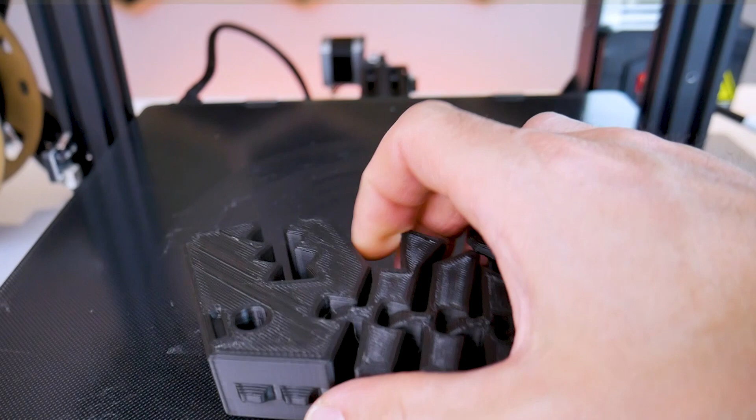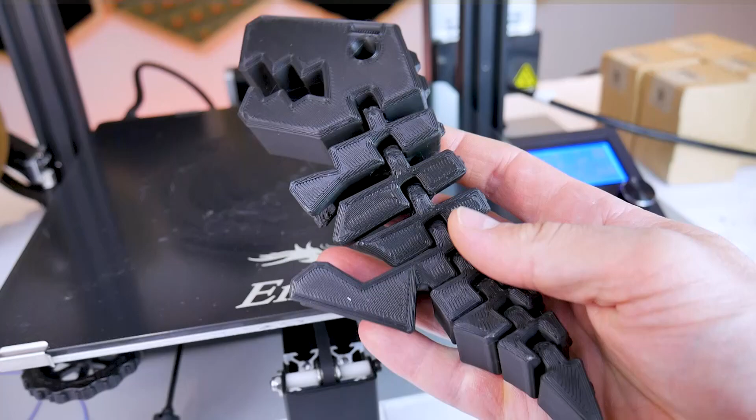So the part cooling fan in that particular case seemed to be working just fine. None of the articulated joints fused together, so again with the 0.6 millimeter nozzle, this was not an issue. The bottom layer was super clean, as you would expect with the auto bed leveling feature. And then you can see on the very steep overhangs on his arms, I probably could use a little more cooling, but these are challenging to print when you're using large layer heights and large line widths.

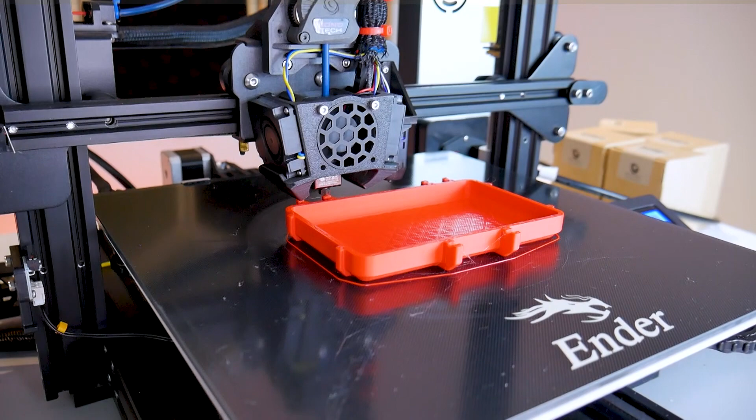After that, I decided to switch over to some very attractive red PLA, and I started printing shells for a drill bit case that I designed, and you can find a link to that video in the top right hand corner of the screen right now. These shells turned out pretty nice looking, although I did see with the red PLA some of the pillowing coming back on the top solid layers, despite going with the lower print temperature again.

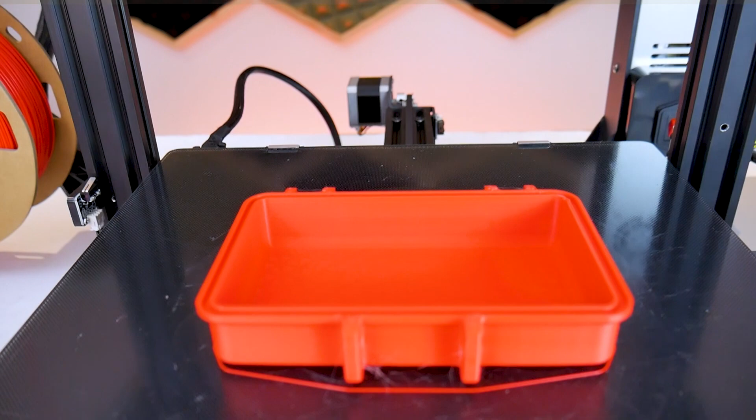By no means am I a filament expert or chemistry major, so I don't know the effect that color would have on the melting temperature of filaments even within the same brand, but I have noticed with some brands that this is the case. So I'm going to chalk this up as just slightly different properties with the red PLA than what I've seen with the blue PLA. Otherwise, this was another very nice print, and I had many more after that where I enjoyed the time savings with this new extruder and hot end setup.

That's it for this video.